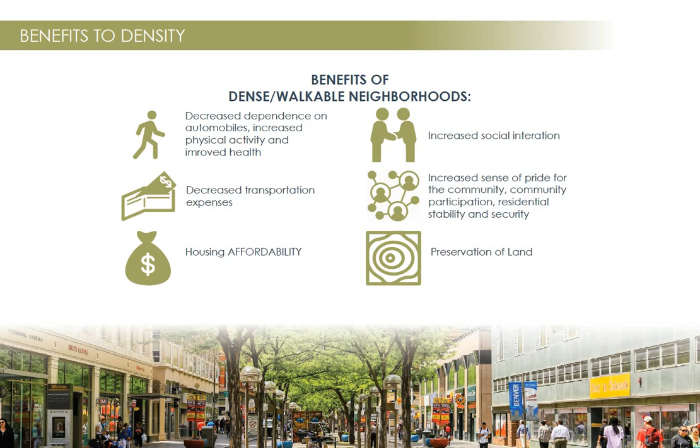Developing infill lots could lead to more dense neighborhoods and possibly more walkable communities, which can provide such benefits as decreased dependence on automobiles, an increased social interaction, decreased transportation expenses, increased sense of pride for the community, an increase in housing affordability, and finally, preservation of land.

One way that developers choose to densify urbanly is through high-rises. Although high-rises do help with density and possibly sustainability, studies show that there is still a preference in single-family homes. In Hawaii itself, studies show that almost two-thirds of the population would prefer to live in a single-family home than a high-rise or other multi-family housing typology.

This has led me to the following question: how do we market density? If families prefer to live in single-family homes, but more dense communities can prove to be sustainable for families and the land, is there a common ground between the two that can take advantage of dense communities as well as provide a single-family home? That question has led me to this project and study.

The goal of this project is to provide families of Hawaii with a unique housing design that delivers on the aspect of comfortable density for Hawaii. To accomplish this, the design will incorporate density, the single-family home experience, and local traditions and way of life. This will all be done within a flexibility within the codes and regulations, all within low-rise housing typologies to help with the single-family home experience, as well as a multi-family housing.

Research and design will be done at 3 different scales. This is important because the full potential of any dwelling design will depend highly on its site context and implementation and the grander urban design.

The first step was to select an appropriate site for the project. The island of Oahu was chosen due to its role as the urban core in relation to the rest of the islands. In canvassing the island and finding a site, Kapolei on the west side of the island seemed like a perfect fit. Kapolei's relatively undeveloped urban core allowed a perfect blank canvas to redesign and implement my project. It was also deemed as Oahu's second city based on its potential in terms of development and commercialization.

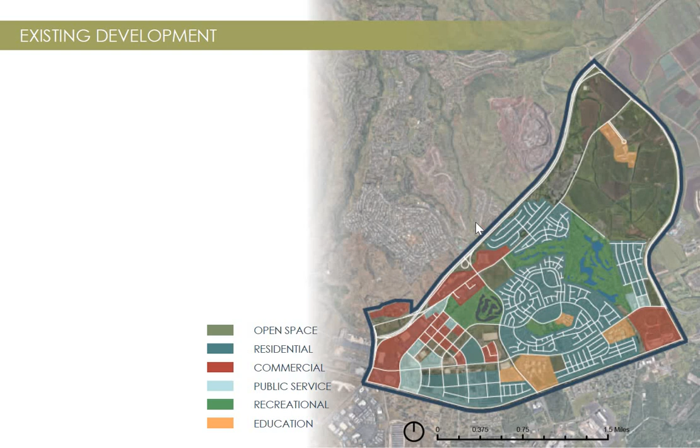So the first step was to look in Kapolei in general. I looked at the zoning as well as the existing developments, open spaces, and buildings and streets.

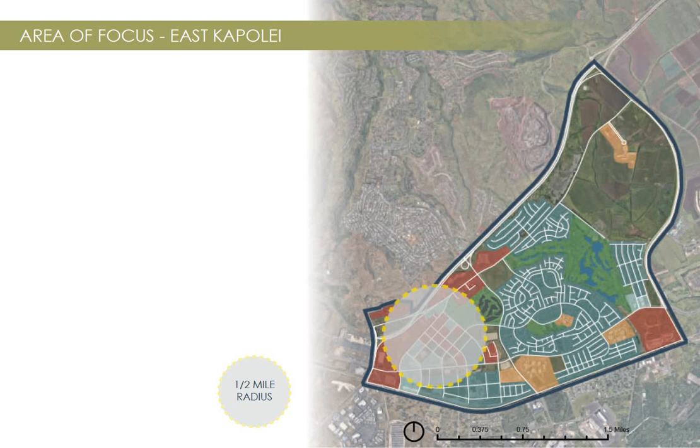I decided to focus my project on the eastern part of the city known as East Kapolei. This was the ideal site due to its concentration of commercial buildings in that area and relatively undeveloped lots within the half-mile radius. Developing this site will help bring residents closer to services such as employment, retail, and other public services. After selecting the site, it was now time to redevelop East Kapolei.

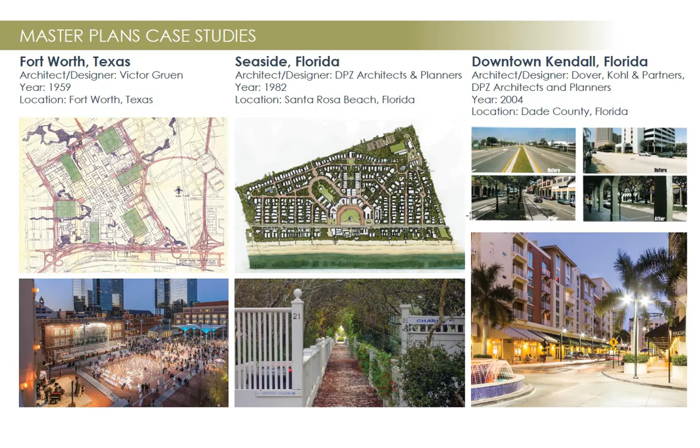Three case studies were researched for the master plan ideas: Fort Worth, Seaside Florida, and downtown Kendall. The four principles taken away from all of these case studies were the use of pedestrian paths, narrow roads, using main anchor points to connect the city, and a true garden city.

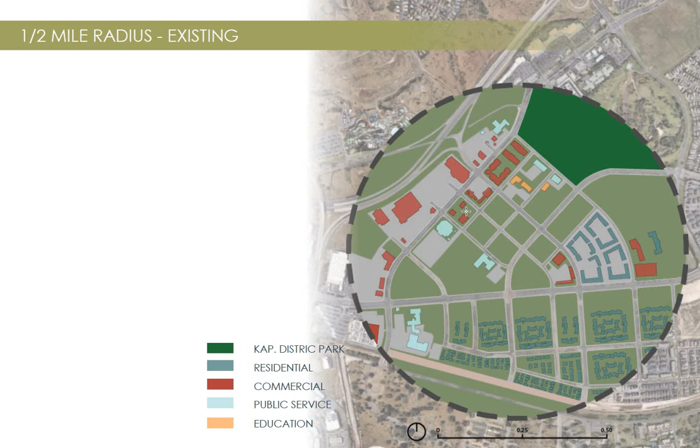Taking the existing site and implementing those four principles into the site, the result is a redesigned East Kapolei with increased landscaping, pedestrian paths, city anchor points, and an overall increase of density and walkability throughout the site.

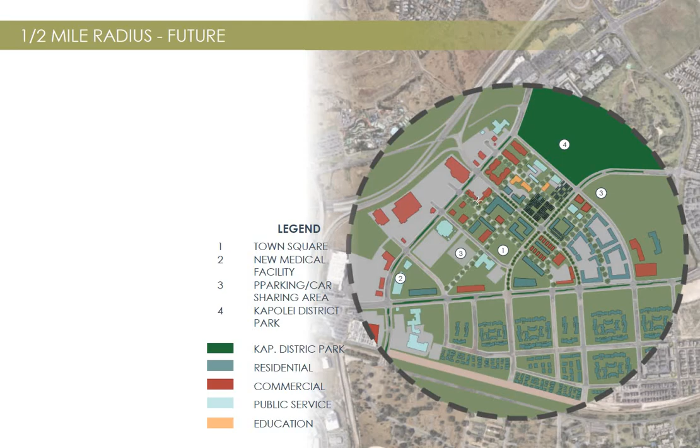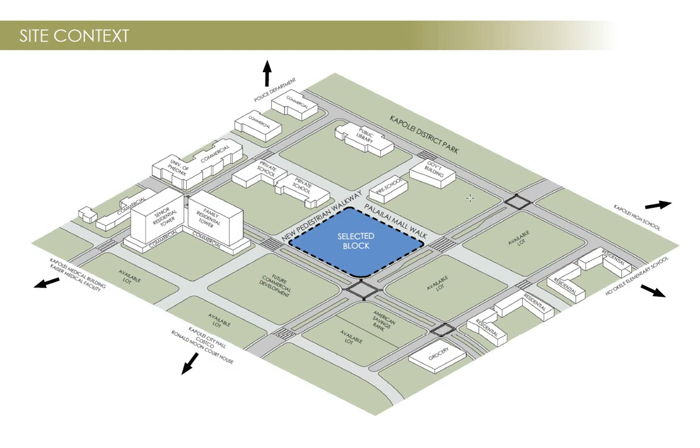The next step was to develop a chosen block within the city. This diagram shows the current vacant undeveloped lots available for lease or sale within the city. The chosen site, which is approximately 3 acres in size and level grade, was chosen due to its location in relation to the park, schools, and other services important for families.

With that block, a quick density study was conducted to get a sense of possible general layouts of the block, as well as test different housing typologies from single-family homes to townhomes. All low-rise housing typology was used to gauge the amount of density possible on the lot.

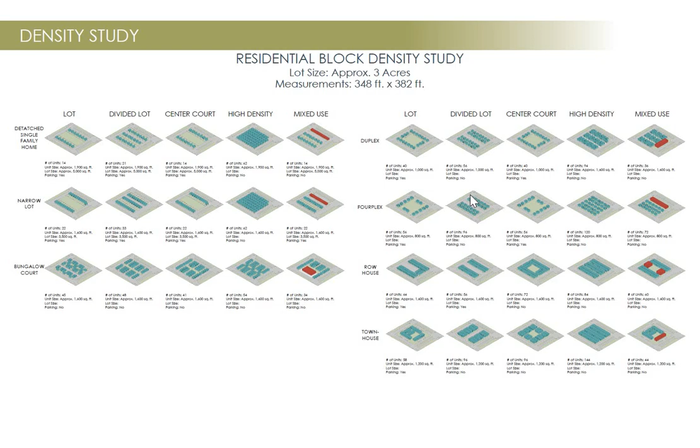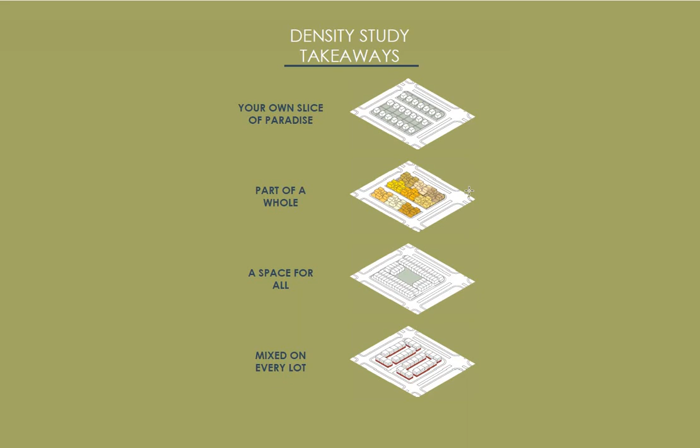From that study, 4 principles were taken away: having each dwelling have its own slice of paradise, each dwelling feeling as a part of a whole, having a general space for everyone, all the residents to use, and the opportunity for mixed use on every lot, or the opportunity for families to run their own businesses if desired within their own dwellings.

From those principles, the block was developed as followed, with individual lots, shared spaces for everyone to use, and cluster groups of dwellings for them to be part of a whole.

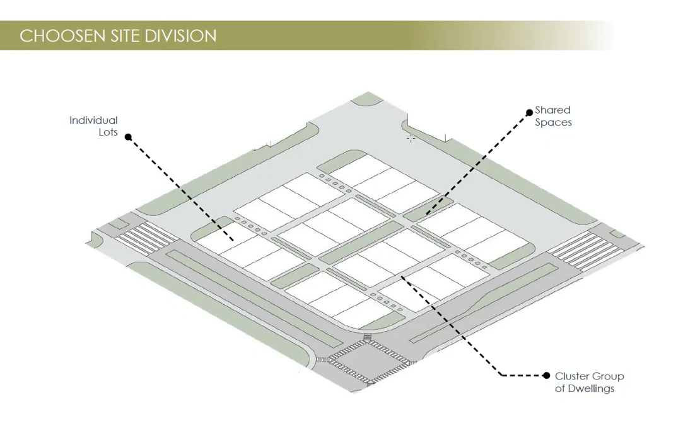Once the general layout of the block was decided on, it was important to establish a general density target in relation to the rest of the city.

This was done by selecting 3 different housing typologies and researching their density numbers. They were a hypothetical single-family home development on the chosen block and 2 existing housing developments near the chosen site, Kapolei Lofts and Hale Moena. To extract densities in these developments, an average of 3 persons per dwelling were used, based on census numbers.

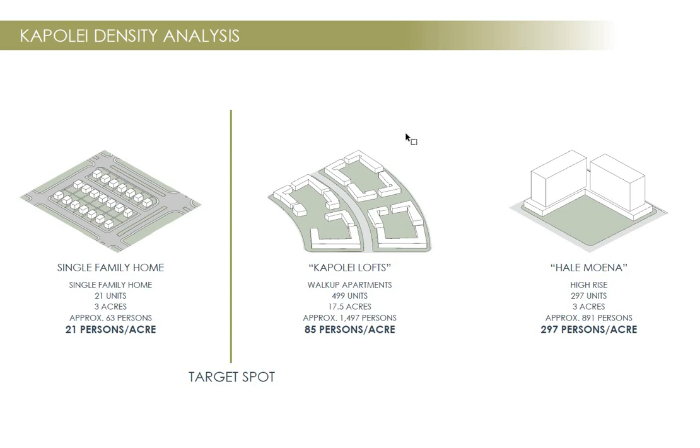As the project attempts to provide more density than a single-family home development, the target was to get as close to the walk-up apartment density as possible without sacrificing the experience of a single-family home.

All of this study and research led up to the design of the new dwelling for Hawaii. 3 case studies were selected and studied based on their innovation and similarity to my project and site. They were the Half House, the Moriyama House, and the Mixed-Use House.

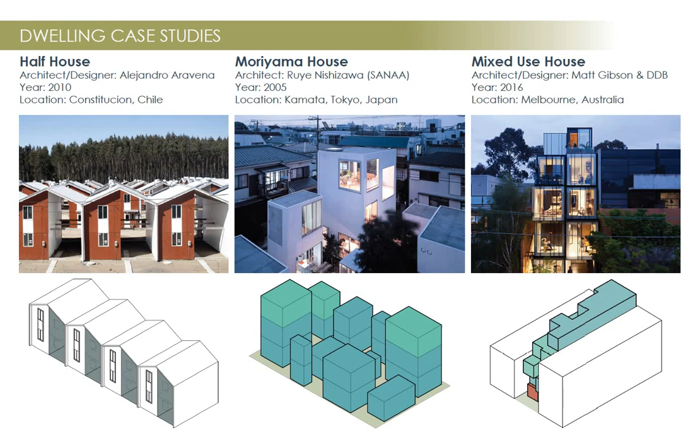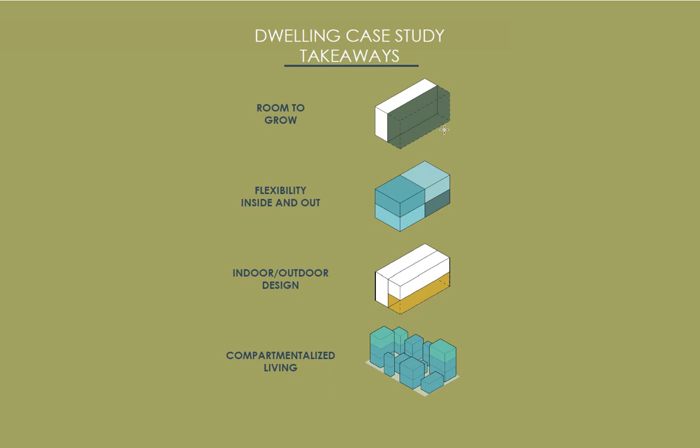After research and diving into those case studies, 4 main principles were taken: 1, having the house have room to grow or be able to expand as a family grows and their needs change; flexibility inside and out, indoor and outdoor design; and compartmentalized living, or the separation of different programs and rooms into different structures on the lot.

It was also important to study the single-family home and understand the experience that comes with it. Study and research shows that the single-family home experience can be defined into 4 different principles: 1 being privacy, both physical, visual, and audio; space around or yard space; ample windows for lighting and for breeze; and the feeling of independence or autonomy within the home.

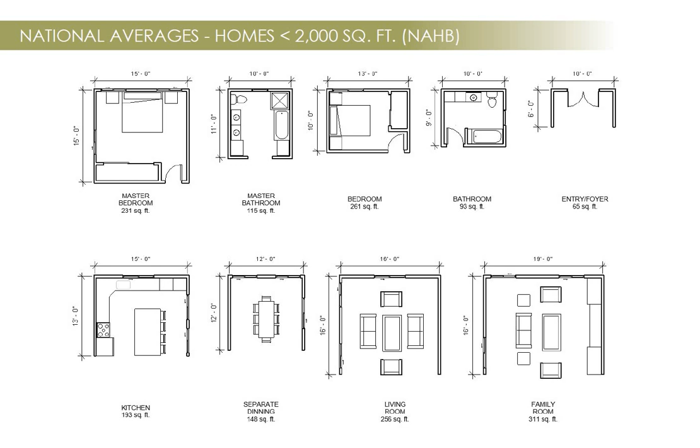This led me to a study of the home's programs. I looked at the average sizes of essential programs in a home and adjusted their sizes for construction efficiency. I then came to the question of, how do we densify without compromising space? As I attempt to densify the block, there will be a presumption of loss of space both within and outside the home.

So how can I design density without it feeling too cramped or overcrowded? I began to explore the following three questions. What if the home had no walls? What if only private spaces were enclosed? And what if the entire lot was your living space?

From those questions, I divided up the programs into two separate groups: rooms that can be completely open and without walls, and ones that needed added privacy and security.

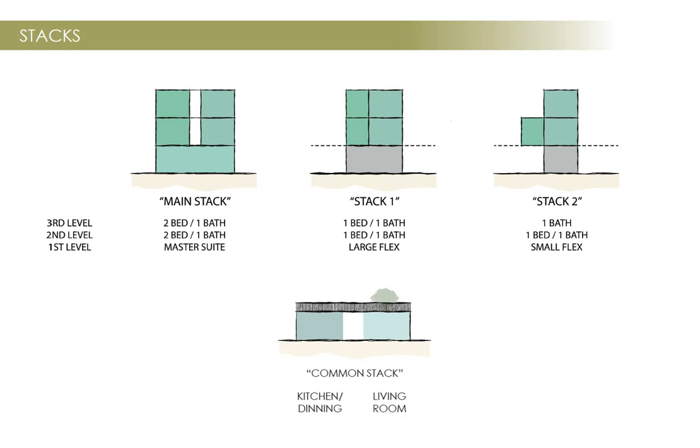I then took those two programs and began to place them on top of one another to create what I call stacks. The top three stacks on this slide, or residential stacks, are made up of more private, secured spaces like bedrooms and bathrooms, while the bottom stack, or common stack, is made up of more open public programs of a home. The residential stacks all vary in size and makeup, but are generally where the residents would sleep, bathe, or retreat for privacy, and the common stacks would act as a shared space between the residents.

In developing the stack, it was important that each stack contained important principles. In the residential stack, natural ventilation and lanai spaces were important for comfort, as well as incremental spaces that could be built in over time if the family needed more room to grow.

Finally, the bottom level of the residential stack would be used as a flex space, or space that could be used for commercial or retail purposes if desired by the family. This will help with income for the families to supplement for the cost of the home.

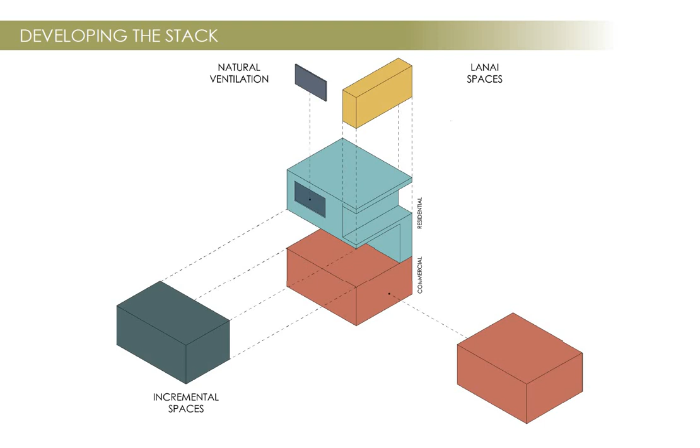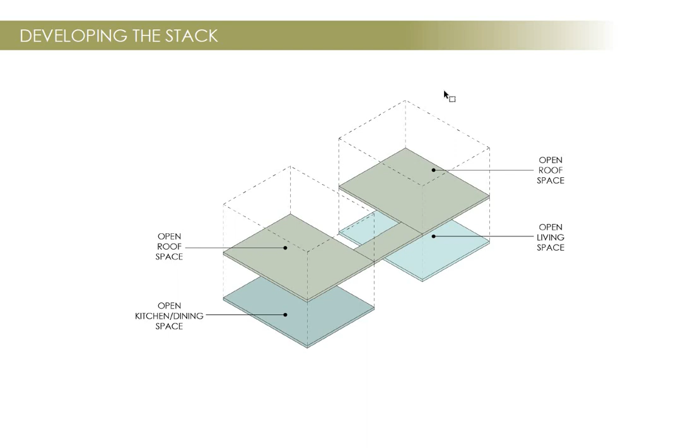The common stack was made up of shared spaces that would be left as open as possible, much like an open pavilion. This stack could provide an open roof space as well that would supplement the loss of yard space around the home. As density increases, the amount of open space around the home would decrease, so providing space to supplement that loss is very important.

In laying out the lots, the dwelling would be laid out as such. The lot was divided into three different bands. The idea is that the main family or the owner of the lot would inhabit the residential band, or main stack, near the rear of the dwelling. Their home stack would be tucked away from the street for added privacy.

They could then use the flex band to rent out more space for tenants or other family members, and also use it for retail or commercial use. This band would provide much needed added income to the family and also provide more housing for other residents to use. The middle band, or sustaining band, would be where the common stack would sit.

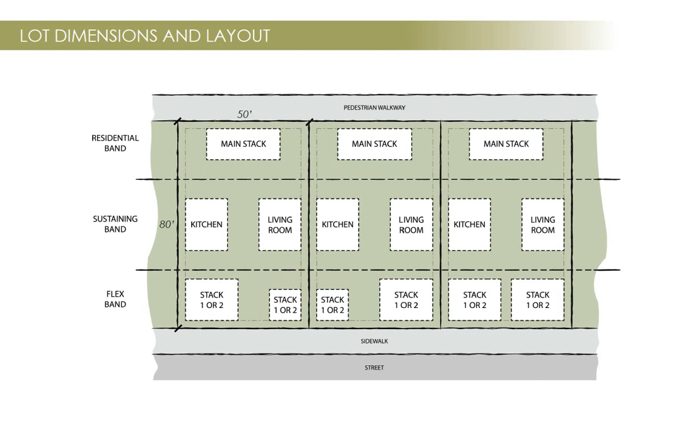This would serve as a buffer between the two opposite bands for added privacy, for the instance that multiple families inhabited the lot.

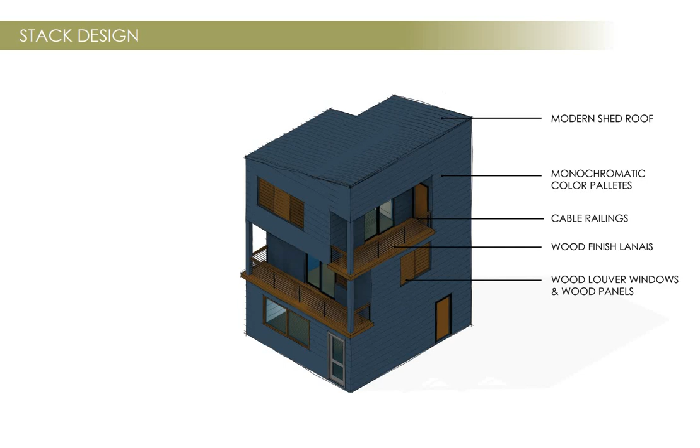Once the lot layout was decided, the last step was to design the stacks themselves. The simple structures were designed as such, with modern shed roofs, monochromatic color palettes, wood finishes for both the lanai and the window. They also included vertical shading devices, sliding louvers for added privacy, and walls that divided the lots.

Another crucial part of design was the ability for each stack to change over time. As a family grows and needs more space, the stack could also grow in phases. This meant the addition of void levels that could be filled in the future.

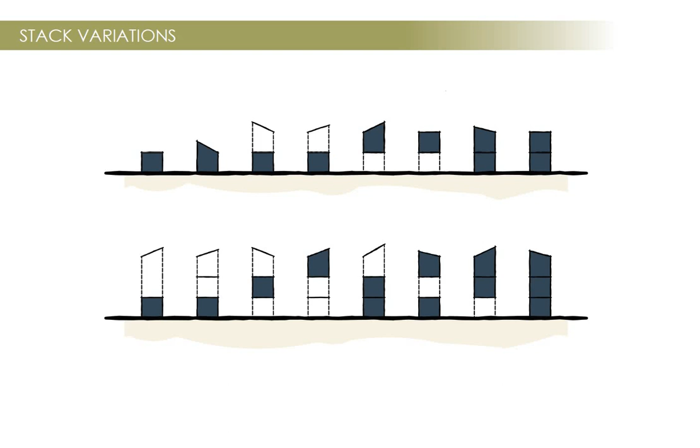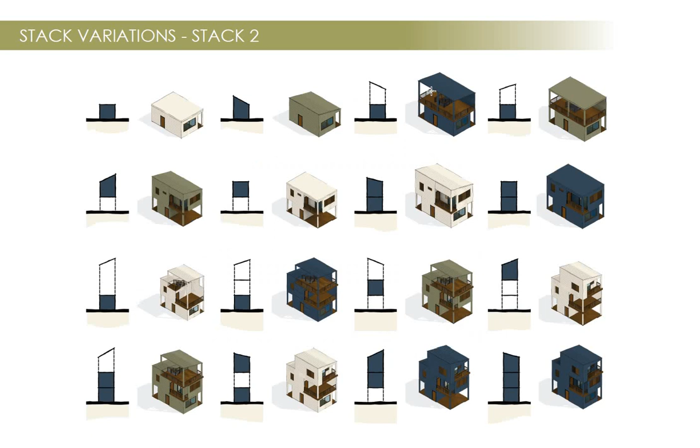Each stack was designed with different variations, much like this program: Stack 1 and its variations, Stack 2 with its variations, as well as the main stack, showing how it can grow over time.

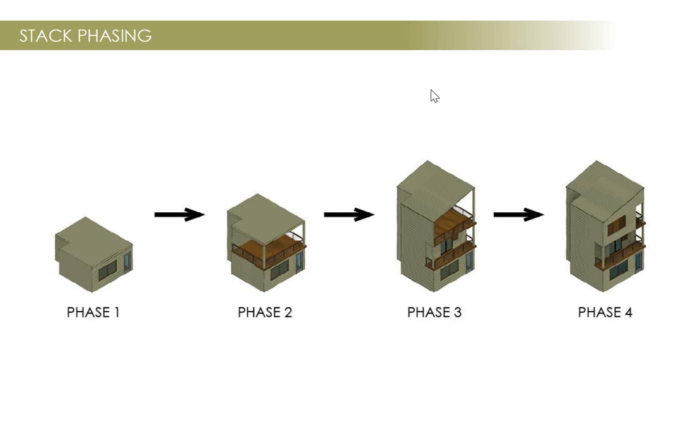As mentioned, these stacks have the ability to be added on and filled in when needed to adjust to the needs of the family. The highest floor would be the third floor with a shed roof signifying the completion of any stack. The common stack was treated as an open pavilion structure with green and/or recreational spaces on the second floor.

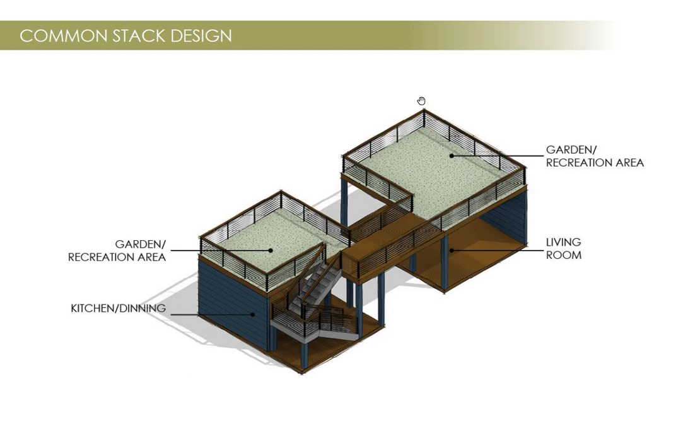This stack was designed to be open to take advantage of Hawaii's climate, but also provide more open space to the lot. The intention of this common stack would be to serve as the main gathering area for the family or families that inhabit the lot.

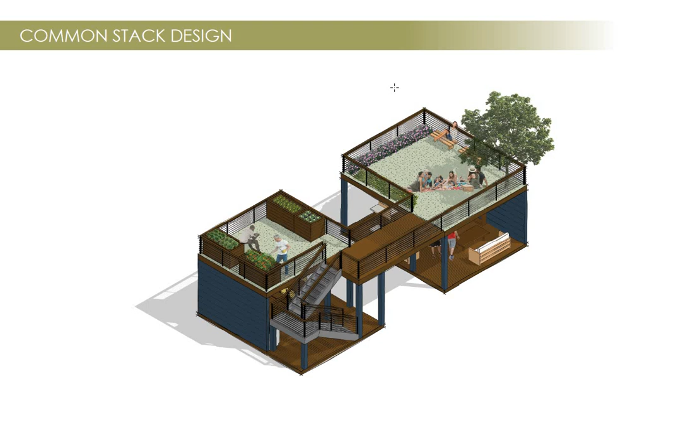It would provide gardening spaces, recreational space, and overall more open space for the residents to build relationships and spend more time together. Just as the stacks can grow over time, the same idea goes for the lot in general.

In a hypothetical example, let's say a young family of 3 buys a lot and lives in the rear main stack. They have a family-run business and utilize one of the flex spaces as a home office, and then receive more income from renting out the second stack to another business and a tenant.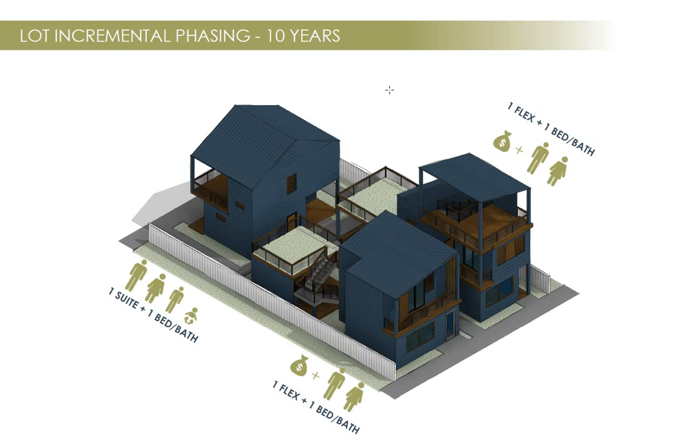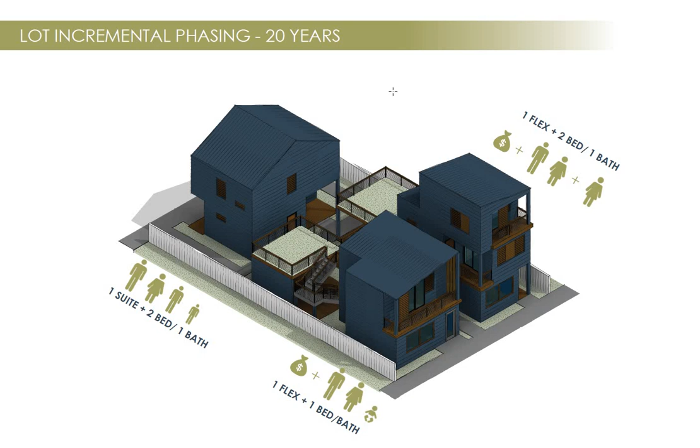10 years later, the family grows and begins to expand their stack and fill in additional space in the flex band for more income from more tenants. Finally, 20 years later, the family completes their main stack and the other flex stacks, resulting in a lot that houses 10 residents and 2 businesses, all on 4,000 square feet of land, while providing space and privacy for all of the users.

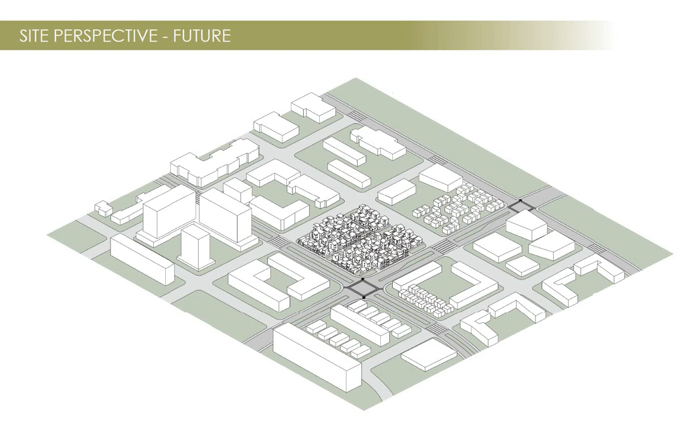This is an example of the 3 developed lots next to each other. Once the stacks were fully developed, they were placed back on the lot. In a quick analysis, although the block was a lot more densified, it did give a sense of overcrowding. To help with this, 4 lots were cleared from the dwelling to add more green space throughout the block. The result was 4 additional green spaces the residents could use. It also divided the block into 4 hypothetical groups of open space and surrounding dwellings that could help in community building and relationship strengthening.

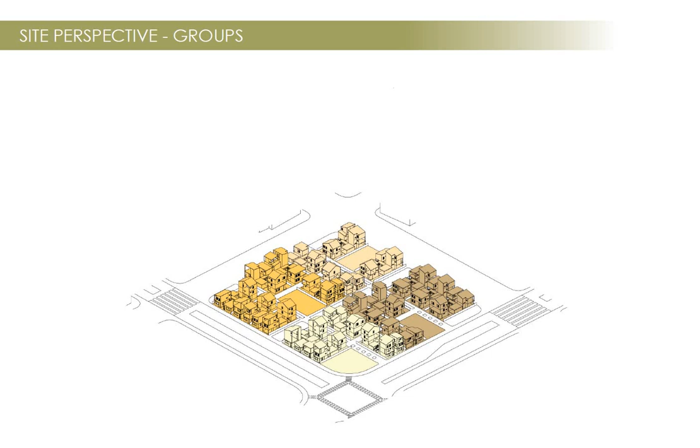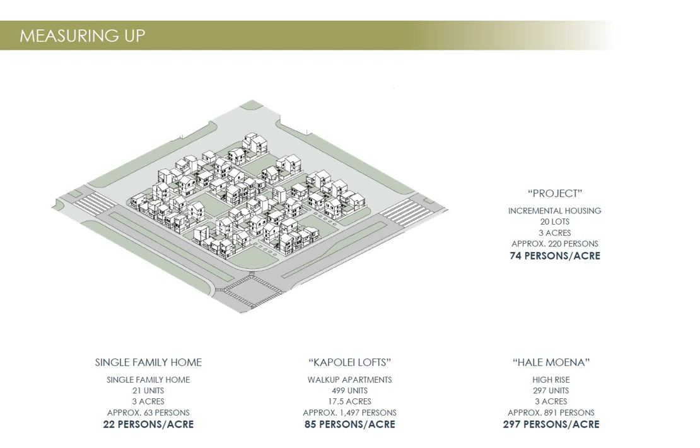After the final block design was created, it was measured back to the original density benchmark. Within the 3 acres, the new development boasted about 74 persons per acre, which is more than 3 times that of the single-family home development and almost equal to that of the walk-up apartment development, Kapolei Lofts.

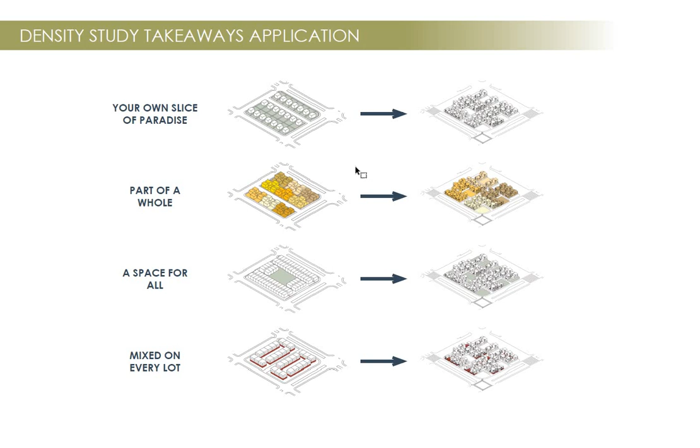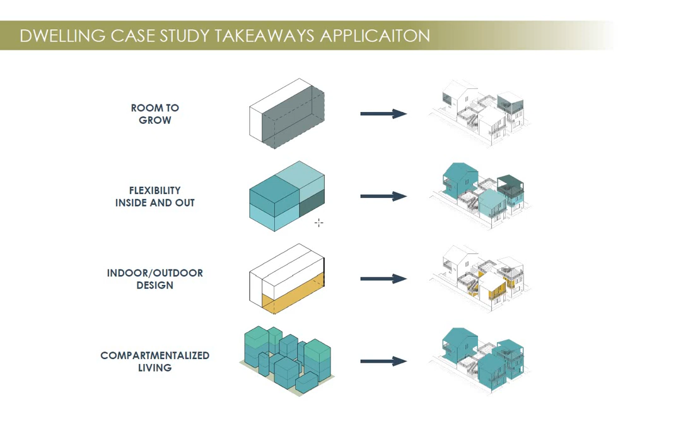The design provided, on the initial block level, guidelines of your own slice of paradise, feeling a part of a whole, a space for all, and mixed on every lot, as well as the dwelling concepts of room to grow with incremental spaces, flexibility inside and out with the separation of structures, indoor-outdoor design with the pavilion, shared space, and the lanais, and compartmentalized living. Most importantly, the design was able to densify the block while also providing the single-family home experience, with privacy, space around, ample windows, and independency and autonomy.

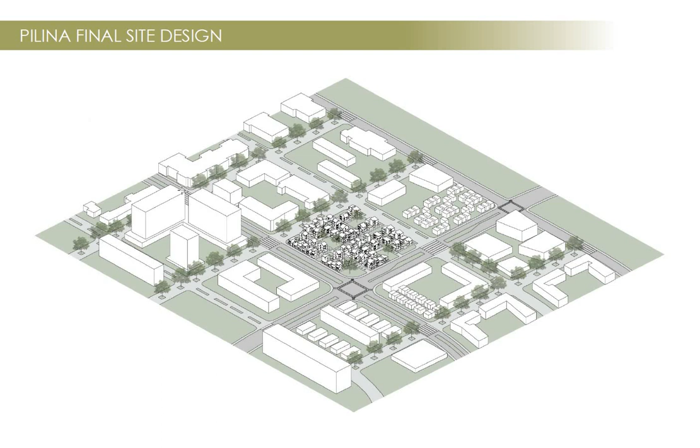The final development was entitled Pilina, which means relationship or bond in Hawaiian, which could signify the relationship built within the tight density area.

Here's a conceptual view of the final block design, as well as a rendered view of the 3 lots next to each other.

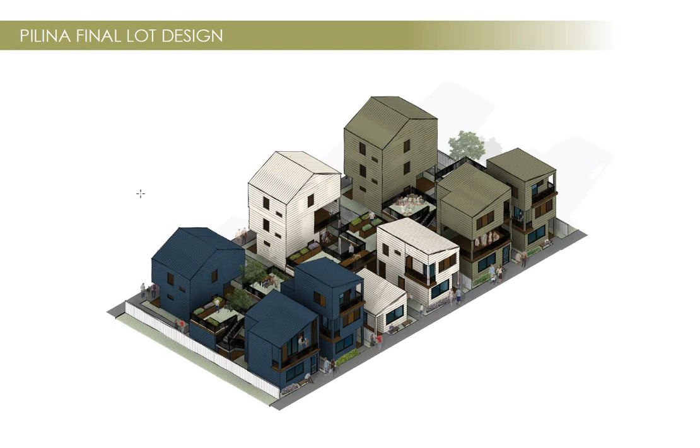And a street view. Now, although such a development design may seem completely different than the typical developments of today, such a development doesn't differ too far from the current and typical zoning laws of a typical R-5 zoning home. As you can see here, there's a slight difference in size and setbacks, with the main difference being the number of structures that could house residents on one lot.

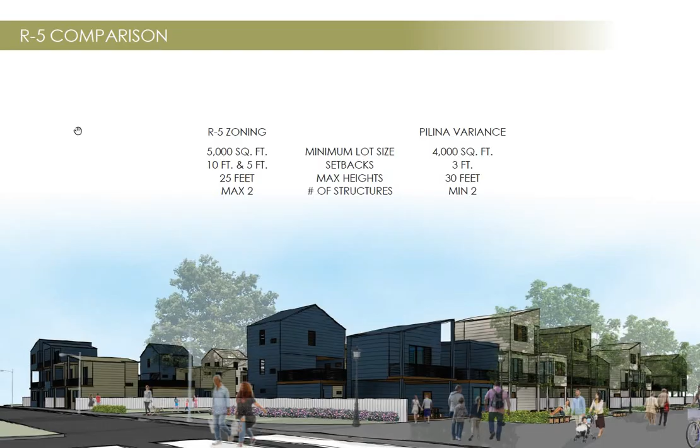In conclusion, this was just one example of what the future of housing could look like in Hawaii in terms of detached homes. Although it isn't the only design that could work, this study brought out 4 main principles that need to be utilized for any future high-density development in Hawaii. They are shared programs, creative open spaces, indoor and outdoor design, and implementation of more walkable communities.

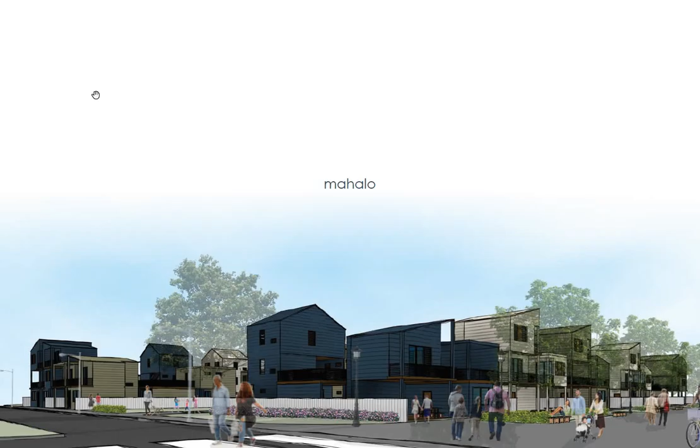In conclusion, such a development is crucial for Hawaii. Although increased housing density is important for the future of the islands and its land, high-density projects could be met with much pushback and criticism, as families still desire to live in single-family homes. Developing such projects as this will allow the residents of Hawaii to shift to density at an easier pace. This will allow the state to provide future, sustainable communities that will benefit the people and protect the land.